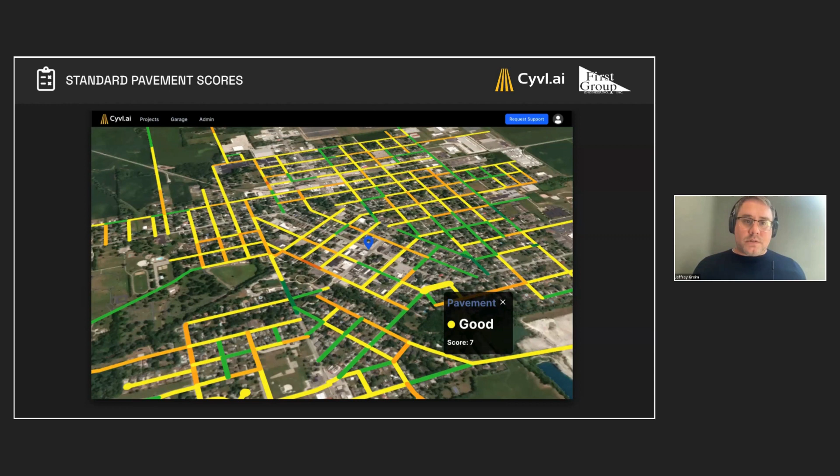So in this slide here, you're looking at a PASER score, 1 to 10, and then the color combinations of what would be a good road or a bad road. This right here, very impressive stuff, but what really makes this impressive is the interpretability of these scores. So if we go to the next slide, please. So when we say that a roadway or a section of a roadway is a 7, it's not a black box just saying, hey, this roadway is a 7 because we say it's a 7.

Instead of that, we were able to provide you with a distress detail report, which you can kind of see on the roadway here. It's every single roadway distress, 3-dimensional, 2-dimensional distresses, and we are able to map them, say where they're located, the type of distress that it is, give a severity rating of the distress, good, fair, poor, and then measure the distress itself, being able to say that it's taking up this much area, it's this length, or there's this many of them.

And you can then take those scores and then interpret that scoring back to what we're giving to the roadway for a segment as well. So it's not just it's a 7 because we say it's a 7, but because of all of these reasons of why it's a 7.

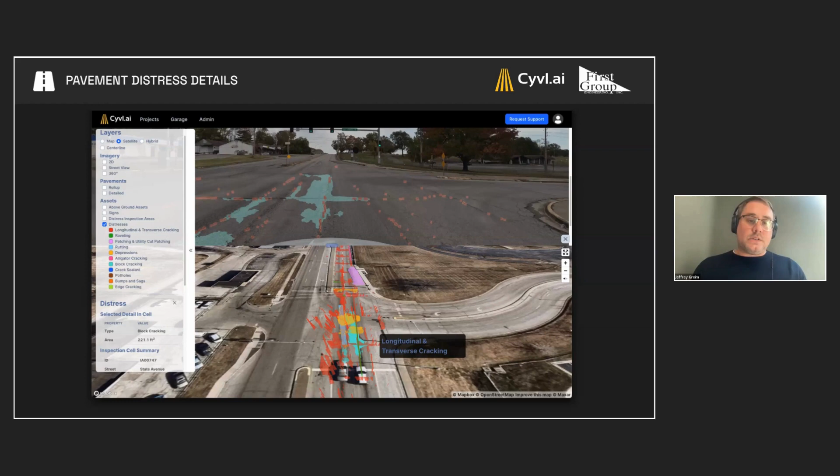And what really kind of makes us special here, guys, and separates us from a lot of the other automated pavement systems that are in the market today, is the fact that we're fusing together mobile LiDAR with imagery. A lot of the other pavement ones in the market today are just imagery alone. Imagery alone is really good at detecting the cracks, saying, hey, here's an alligator crack, here's a block crack, here's edge cracking. Where imagery alone really kind of struggles is those 3-dimensional defects.

It's very, very difficult for AI to detect three-dimensional pavement defects from a 2-dimensional picture. So any of your rutting, your potholes, distortions, your bumps, your sags, a lot of those different defects are going to be missed from a 2-dimensional picture, but they're very easily picked up from our 3-dimensional mobile LiDAR. Also, by having 2 separate data sets that we're applying our AI to, it allows us to eliminate a lot of the false positives that are out there.

So if we just had imagery alone, that would be our only source of the truth. By having 2 separate types of data sets, we're able to compare and contrast the results. So for instance, AI is great, but AI is not perfect. Anytime there's a shadow on the roadway, your AI is going to interpret that shadow as a patch in the pavement, as a crack in the pavement, as a pothole in the pavement, because that's what it looks like on a picture. It's very hard to determine from a picture that different color distortion is just a shadow.

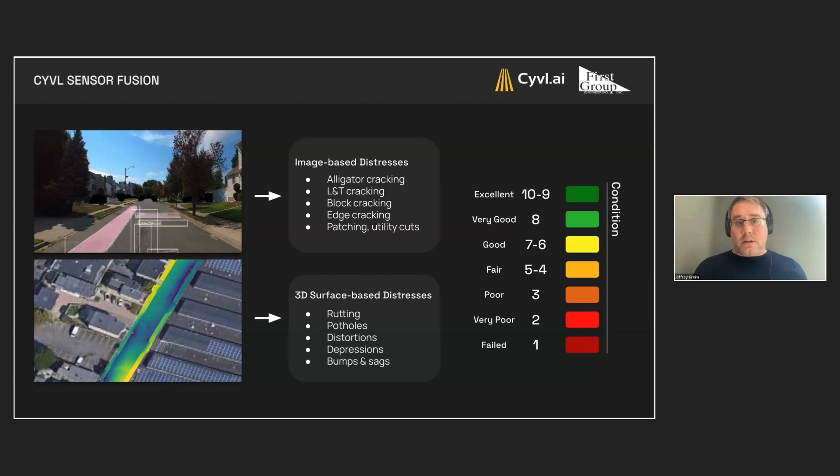And just to give you a great visualization of how mobile LiDAR is able to see these 3-dimensional defects in the pavement, here's a mobile LiDAR scan of a typical roadway. And you can see throughout this roadway, there's some bumps, there's some sags, there's some heaves. A lot of these defects are not going to be picked up from traditional imagery alone.

But by having this mobile LiDAR scan the roadway as well, we're able to pick up these defects that would have been missed. Sometimes these are even missed from a person driving down the street, especially lower severity rutting, things of that nature are going to be missed just from driving down the road. This mobile LiDAR is able to pick up these defects and get you highly accurate pavement scores because of that.

So in addition to doing pavement scores, we can map and assess just about every other right-of-way asset. A very common one that is asked for is being able to do these lane markings and lane striping inventories for towns and cities. We can easily create these files for you that can be uploaded directly into your GIS formats.

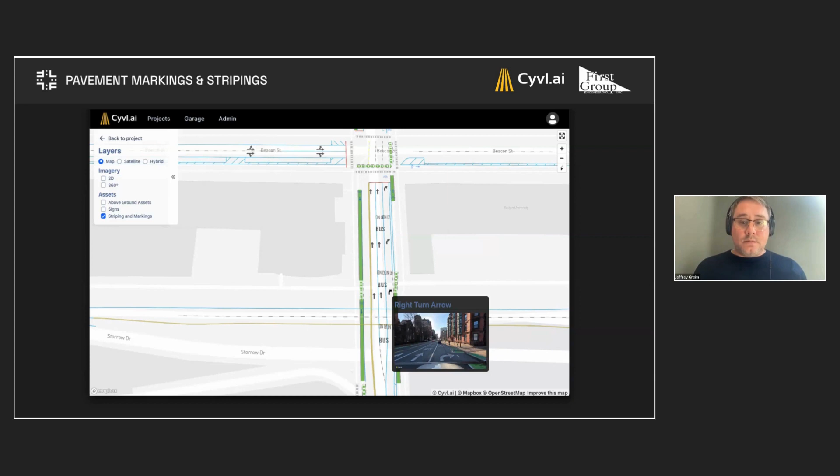Oh, you skipped over one there.

So instead of just doing a pavement assessment, you can simultaneously be doing a sign inventory, simultaneously doing lane and pavement marking striping, and really mapping any other right-of-way asset that you want for your project.

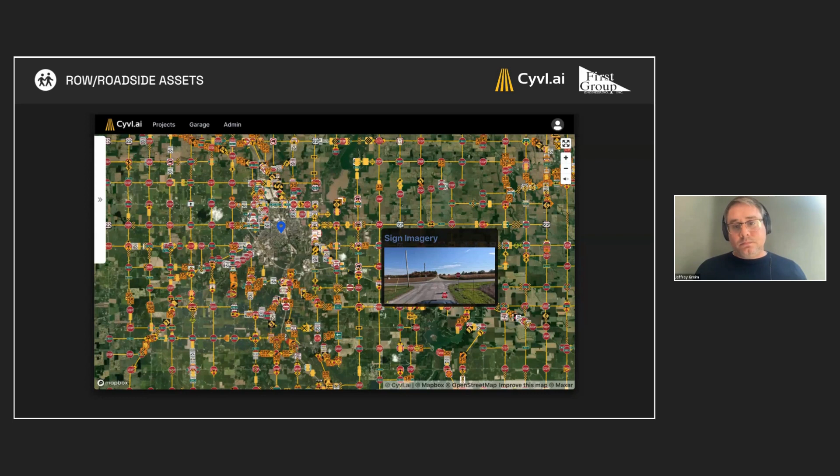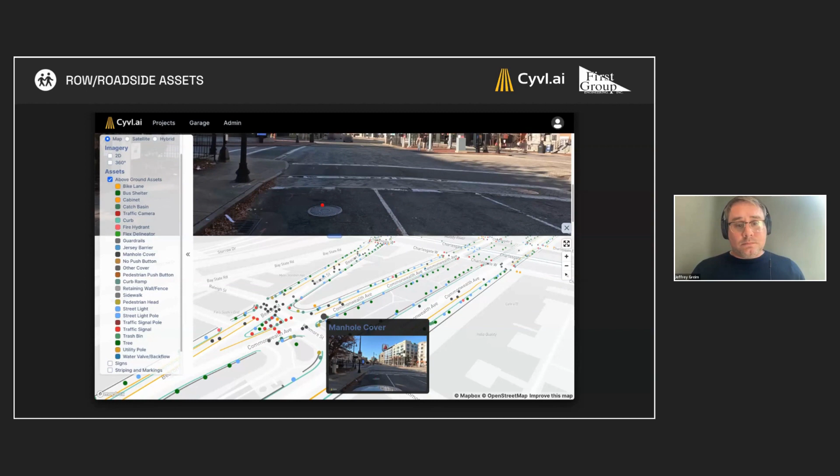On our own platform, which you can have access to, you can view and see all these different features. You can click on one of the assets on the screen, a picture will come up with a point on it showing exactly where its location is as well. For here, I clicked on a manhole cover on our platform. Here's the picture of the manhole cover, bounding box around the manhole cover.

And the whole process is very, very simple. We ship our sensor to one of our partners. They drive around with the sensor on their vehicle. They upload that data to us. We then have our proprietary AI that goes into the data that they've collected and pulls out all the deliverables that they need for their particular projects. Then we post the deliverables on our website and they can download them directly from there, and we can format them so they're integrated easily into the software of their choosing.

And really, what we're trying to do is eliminate the need for a lot of these manual assessments where you're going out there mapping and measuring manually, and replace it with simply driving around, much safer, more efficient, allowing our partners like First Group to do many more projects in a typical year than they were able to do before, while also maintaining a high level of quality for the projects that they're doing.

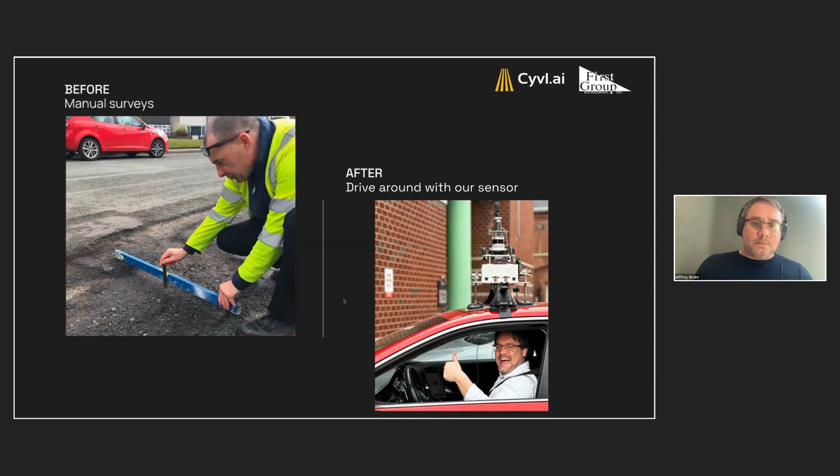And these are the main benefits of using our technology. I'm sure Shawn will probably speak through a lot of these as well, but automatic inventory of many assets at the same time. All this data can be processed simultaneously. No additional staff is required. Very affordable, very scalable. And on top of that, once we've mapped a town for you, we can go back into that data and pull out deliverables later on as well.

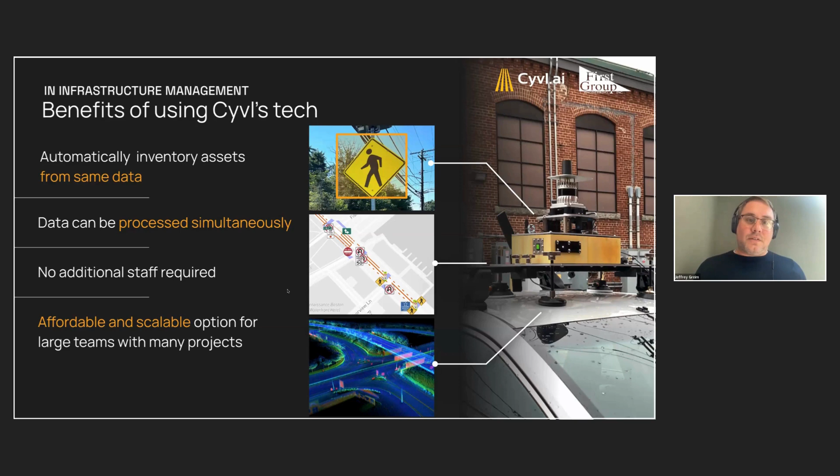Or a couple of years from now, you're going to do another scan of your roadways. We can do a comparison study between the scan from 2 years ago and the scan today, and we could show you all the changes that might have happened within the environment during that 2-year span. So maybe your town forgot that it's put up some different assets. We can point out those new assets that are there. We could point out some assets that were there 2 years ago that are no longer there, and make the town aware that these different assets are no longer available.

Mr. Shawn, it's on you.

Okay, so at First Group Engineering, we're of course first a civil engineering firm. We've been around since the mid 80s. I think 84 was when we started technically. We work in a lot of transportation and traffic engineering. We do construction inspection, land surveying, right-of-way, and telecommunications even. And I kind of got a lot of the asset management going probably 8-9 years ago.

It became apparent to me when talking with a lot of clients that there was a lack of record keeping for roadway assets, that when you start to look at a county, for example, and you realize that if you tally the roadway value of your county up, it can easily be $500-600 million, that possibly you might be wanting to take better records of that.

So we started looking a lot at doing asset management back then, and just creating plans that would show costs and maps of proposed improvements, and ways to pay for that, and seeing where you were going to be at in 5 years. And we started to see improvements, especially in communities that were going into that full bore. You were starting to see improvements, especially in roads where maintenance was, I guess, key more so than others. You definitely run into issues, especially back in the early 2000s, where some roads would get more love than others.

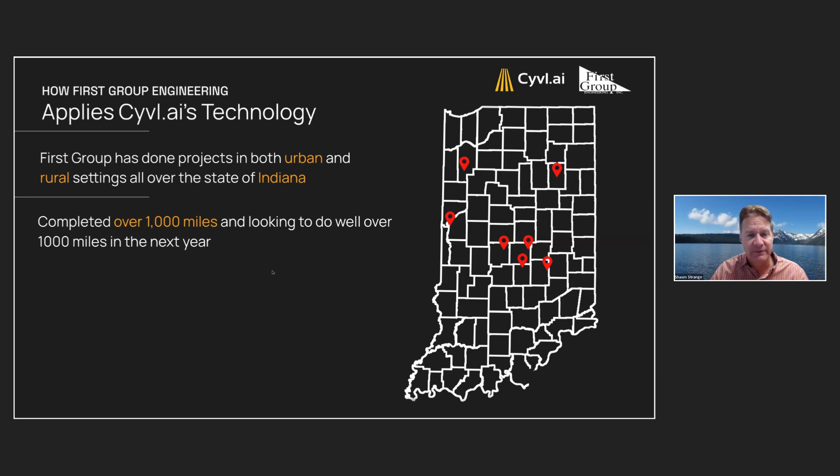So now, how are we using it? We're definitely improving asset management. It's not just road ratings we're getting now. We're getting signs. We're looking at lighting. We've been asked to look at utility poles, especially trying to differentiate between city poles and utility poles. So the data we're getting is much more robust, and it's improving what we can do as far as organization goes, which does help in prioritizing what you really need to look at.

And of course, this better data gives you more avenues to go, especially when you're looking at going after funding, whether it be Community Crossings or HSIP or any kind of other grant. You have something that's very robust, very easy to use, very easy to prove what you have at your fingertips.

GIS data works well with spreadsheets as well as other database software packages so that you can output what you need in a tabular format or print it in a map format, which you saw before with the red, yellow, green type of rating system. And of course, that gives you a lot more functionality as far as coming up with solutions, as far as sign replacement, maybe new posts, looking at replacing guardrail where end treatments have been hit.

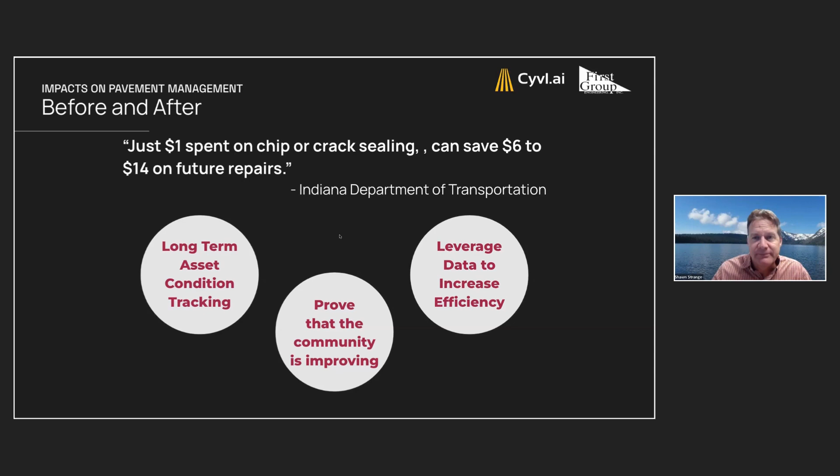So next thing, one of the really cool things with this software is the 360 imagery every 30 feet. A lot of cities and towns have Google imagery through most of the streets, but a lot of small to mid-sized towns, especially in Indiana, only have sparse coverage. And the imagery that Cyvl.ai gives you is basically as good a quality, if not better, than what Google provides on a very timely basis. So you definitely know when the street view was done, what date it was done on.

I've had a couple communities reach out to me just talking about this alone. There are zoning issues that they were concerned about. They've realized that they have constituents that raise complaints on things that they can now track over time, so that they can see that the complaint was valid 2 months ago or not, or if something is really a systematic problem. So the imagery coverage is definitely a plus with the output of the software.

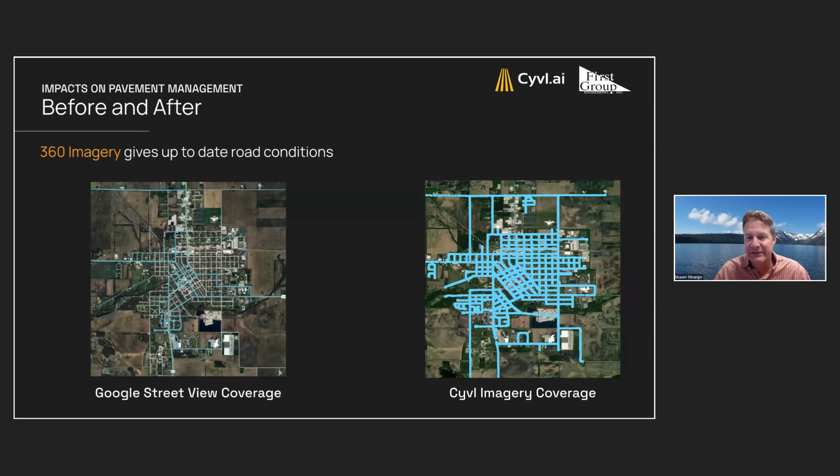So what's this software able to do? It definitely allows us to take on larger projects. We can do cities on a very economical basis. Cost-wise, moving forward, it's definitely very cost competitive on a city front. And on a county front, it is still comparable in cost to boots on the ground, except you get a lot more data for it. So I would say it's still more bang for the buck.

And it allows you to not only get the PASER ratings, but you have LiDAR data, imagery data, and can easily add on sign data and other infrastructure, manholes, guardrail, sidewalks, other things like that. So all in all, it's just a much more cost competitive and efficient system to use than the old school method, and definitely a lot faster.

So with that being said, Jeff, I don't know if you had anything to say, rounding things up. I think you did a pretty great job there, Shawn, man. Made it sound awesome.

Well, this is definitely exciting stuff. When AI first reared its head, I had no idea how it was going to be used, especially in our field. And now we're starting to get an idea of where it's coming from. I'm starting to use AI in other functions as well. Even writing emails, I've used AI to create kind of a base format for some types of emails. So you start to see where it's coming at you in our daily life and how you can use it to speed things up and organize it.